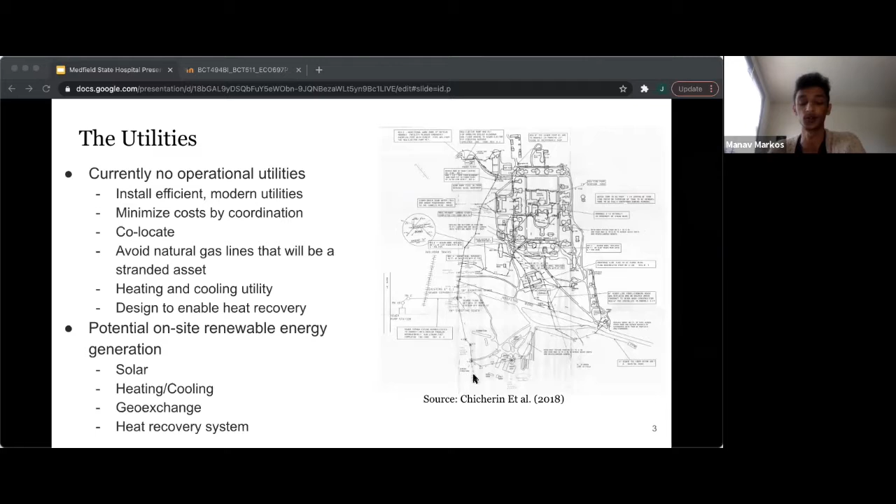So some of the town goals for the site redevelopment. The town of Medfield is looking to redevelop this campus into a community consisting of senior housing, affordable housing, and commercial shops, such as restaurants and art centers. We looked into what Medfield wants for this project. In Article 20, the Medfield State Hospital District Zoning Amendment, it outlines in the purposes of Section 1, subsections F and G. F encourages preservation and rehabilitation of historic buildings, and G encourages the adoption of energy and water efficient building practices and sustainable construction methods and practices. We have designed our solution to fit this exact criteria.

Our solution is that we are proposing a district energy system, as it will address a number of the site's needs. It would allow for all of the energy efficient heating and cooling systems while keeping the site's beautiful aesthetic and historic feel. So your next question might be, what is a district energy system? A district energy system is a system that uses centralized equipment to transport heat energy to heat and cool buildings. A DE system circulates low temperature hot water or cold water for climate control of the interior space. It can also provide or preheat domestic hot water.

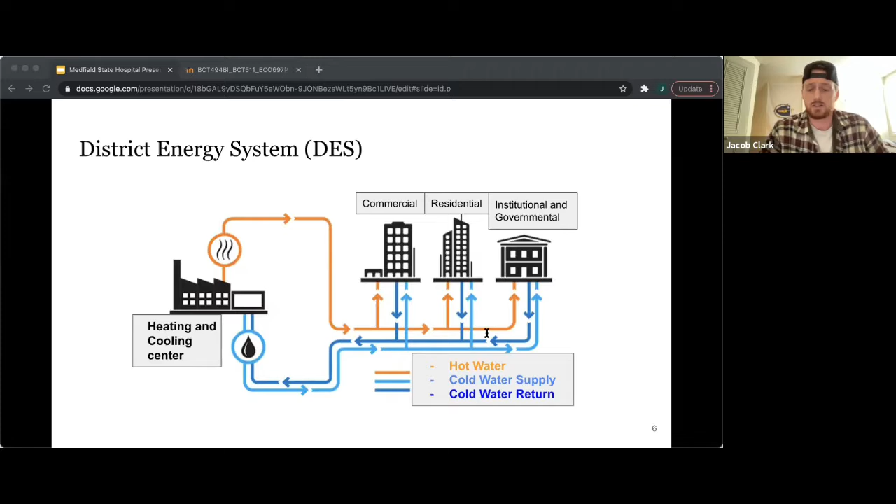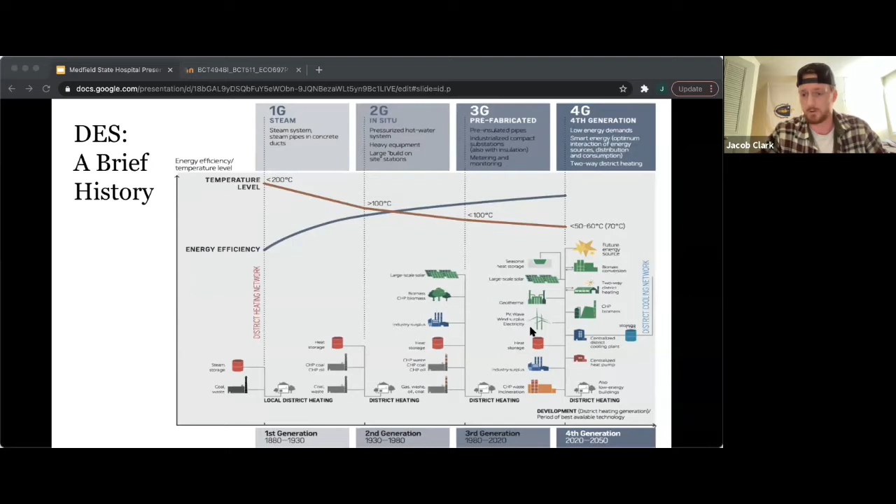Below 60 degrees Celsius, which is 140 degrees Fahrenheit, it's possible to use renewable energy and heat pumps to deliver heating at efficiencies as high as 800%. There are several modern DES characteristics that Medfield would benefit from if included in the design, such as designing for prefabricated distribution systems with accurate metering, designing for multiple sources of energy. You'll notice that the fourth generation of DE systems can make use of both short and long-term heat storage, geothermal energy, and centralized heat pumps and chillers.

Designing for low energy buildings, effectively allowing the DES to satisfy all energy needs at considerably lower cost than individual systems in each building would. We will be discussing high performance standards for insulation and air sealing as a critical recommendation in this section. Lastly, designing for two-way district heating and cooling, allowing the system to trade heat between buildings. This means buildings with excess heat have it removed and transported to buildings that need heat, resulting in an extremely high efficiency.

I also want to point out that being part of a district energy system does not mean that every building, every section within each building gets one temperature. There are thermostats in each of those areas to separate heating zones, and residents in each unit can choose the temperature they want, and the temperature sensors end up sending heat to where it's desired.

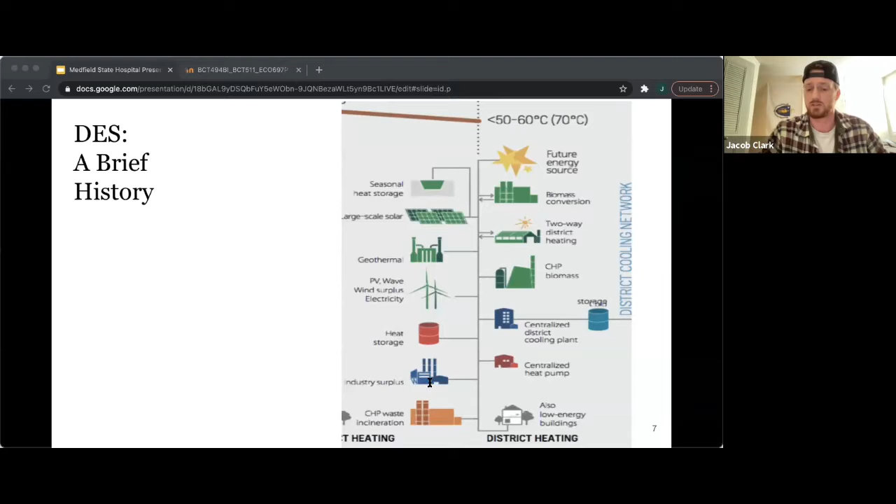A DE system allows for easy expansion for other sources post-development of the DES. This is really important. Like a solar field could be readily integrated into the energy system without any major overhaul. A thermal storage field could be added. Heat recovery from sewage could be added, and emergency backup generators, which should be added. DES can be easily managed through various systems, such as a Geographical Information System Network, known as GIS. And GIS is a spatial data tool, which Brett will go more in depth on right now.

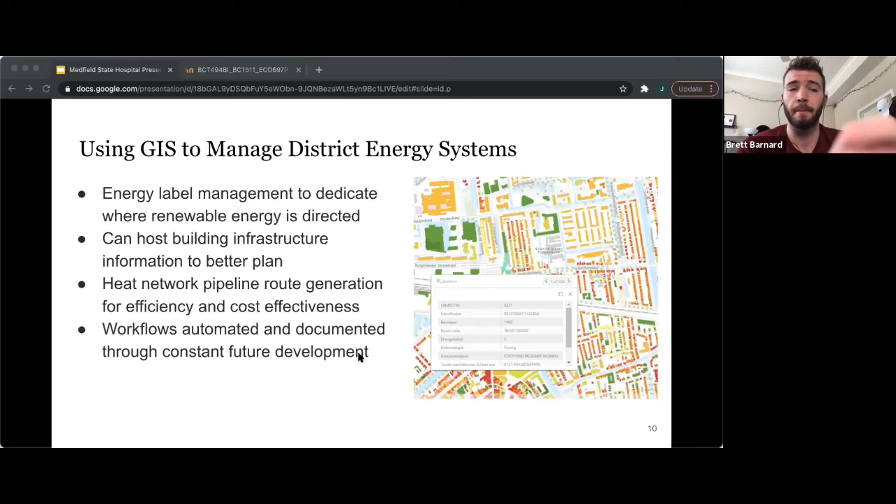With pipe planning as well as extension, GIS can generate the most efficient and cost-effective routes for these pipelines, such as going through a grassy field or area instead of intersecting under various building structures that have pre-existing pipelines, so it can keep future planning consistent as well as lowering further costs. And it can also help with documenting workflows and automating those with the added benefit of increased consistency to pinpoint these issues and maintain work orders.

This DE system we propose comes with numerous benefits, such as it allows for cheaper operational costs, efficient energy production, and heat recovery. It's future-proof, as mentioned before, meaning there's flexibility with renewable energy and reduced maintenance costs. There's also benefits that haven't been mentioned yet. These buildings were designed for using a district energy system application, as Jake mentioned previously. This hydronic heated water distribution system uses small pipes as opposed to large air ducts.

Retrofitting is a difficult process that doesn't give the best results. It would not apply to this project because this system could be designed specifically for this Medfield State Hospital. Avoiding retrofitting avoids one of the largest costs by doing it right the first time. District energy systems are not restrictive, just as long as the developer designs for low temperature hot water. Finally, a DES allows for easy expansion for other energy sources post-development, as Jake mentioned previously, as well as being easily manageable through various systems like Brett also mentioned.

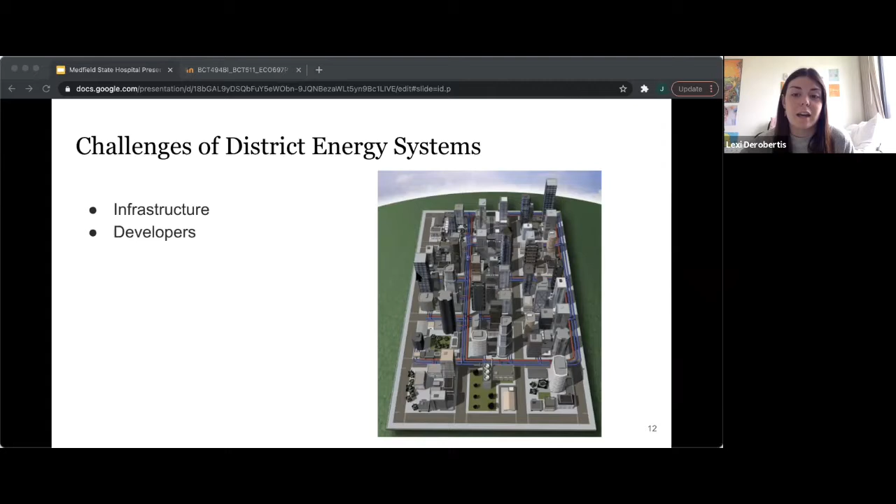Finally, the DE systems are more common in Europe than in North America. So many local developers may not have built a DE system before, but that shouldn't be excluded solely on that. We will recommend the developer qualifications later in our presentation.

Our team agrees that as part of the DES, a geo-exchange field combined with heat pumps should be a part of the system. Let me share a bit about those. Heat pumps are powered by electricity, and heat pumps aren't just for heat, but can provide both heating and cooling. They operate similarly to a traditional air conditioner, but can switch between heating and cooling modes depending on the season. In the case of district energy systems, they can also move heat from a building that requires cooling to one that requires heating, essentially doubling the energy efficiency.

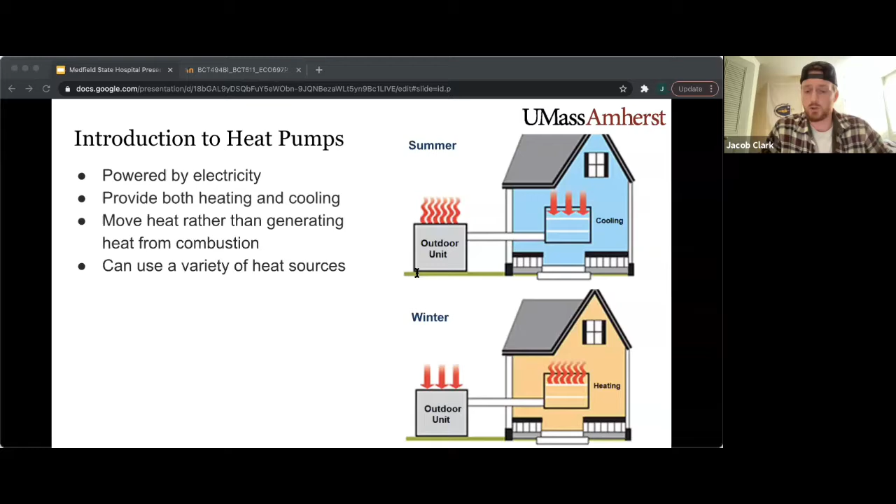Heat pumps move heat across a temperature gradient rather than generating heat from combustion of fossil fuels. This improves the system efficiency. And heat pumps can use a variety of heat sources and distribution systems, which we'll discuss more in detail on upcoming slides. Heating and cooling can be distributed in the form of hot and cold water, a hydronic system, or air.

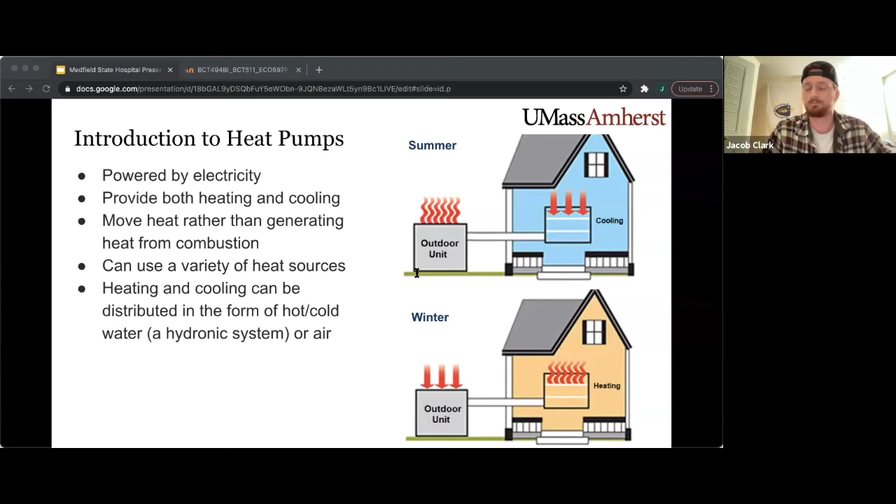There are a variety of types of heat pumps, and this slide gives an overview broken down by heat source, which is where the heat pump obtains heat in the winter for heating purposes and where it rejects heat in the summer for cooling purposes. The first option is an air source heat pump. They are most commonly used in the US, and they have the lowest initial cost. Their heating efficiency and capacity does decrease with decreasing outdoor temperatures, but even in very cold weather, modern heat pumps still provide heating at twice the efficiency of boilers and furnaces.

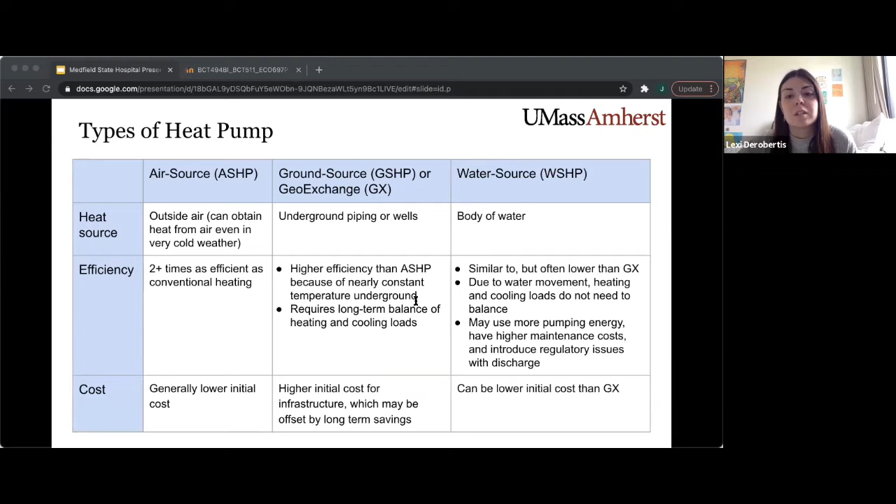Another recommendation we ask you to consider is a geo-exchange system, also known as a ground source heat pump. These use underground piping as the heat source, which requires a greater initial investment into infrastructure, but also provides higher efficiency because the temperature underground is more consistent throughout the year. Geo-exchange systems require appropriate site conditions, which Brett has created a suitable map for and will discuss shortly. The last option you should consider for this site is a water source heat pump. With this, the nearby Charles River could be used as the heat source.

Okay, so you've heard us discuss geo-exchange a few times by now, and with that being one of the main energy sources, we want to dive into a little more detail here. So at its simplest form, geo-exchange is a form of thermal heat storage where that heat can be stored and reused in the future. A geo-exchange field works by drawing its power or the heat from one source and then pumping it into the other.

So in the winter months, that heat would be drawn from the earth and be pumped back into the interior spaces of the buildings. In the summer, that heat will be drawn out from the buildings, those interior spaces, and then pumped back into the earth to be stored to be used at a later date.

So it's different from typical space conditioning units, where geo-exchange heat pumps are not exposed and have fewer mechanical parts working. So it'll be much easier to find a source and central location. You have better visibility and ease of maintenance there. This is what you call a balanced heat source and heat sink. They're much more dependable due to the earth having a very consistent temperature, as opposed to outside air temperature used in many heating systems, which has a high amount of fluctuation to it.

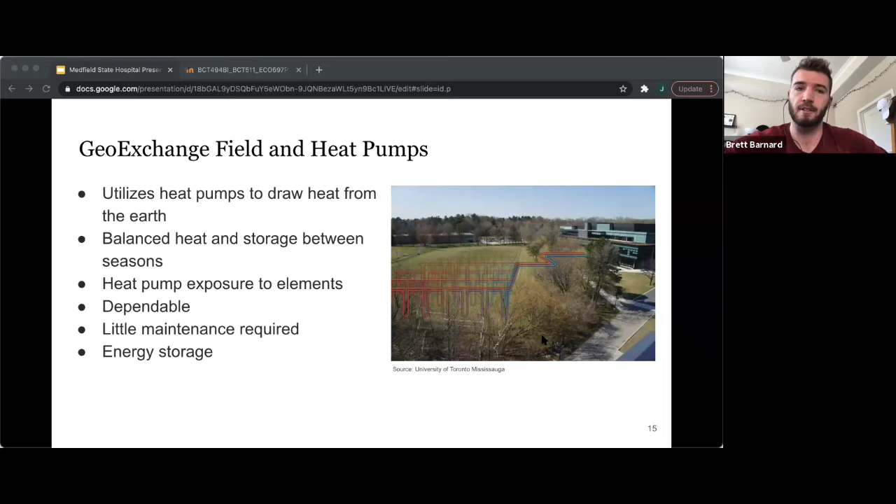And with these geo-exchange fields, you can't really simply put them in any single field. You'd want to do it to maximize its efficiency. You'll hear us talk about maximizing efficiencies many times. So geo-exchange fields have certain conditions of where they should be implemented based on a variety of factors. One of those big factors is going to be the soil. There are various soil characteristics which can make geo-exchange far more efficient and suitable. Some of those being proximity to the water table, how resistant that soil is to flooding, the moisture content, and then the soil saturation and drainage.

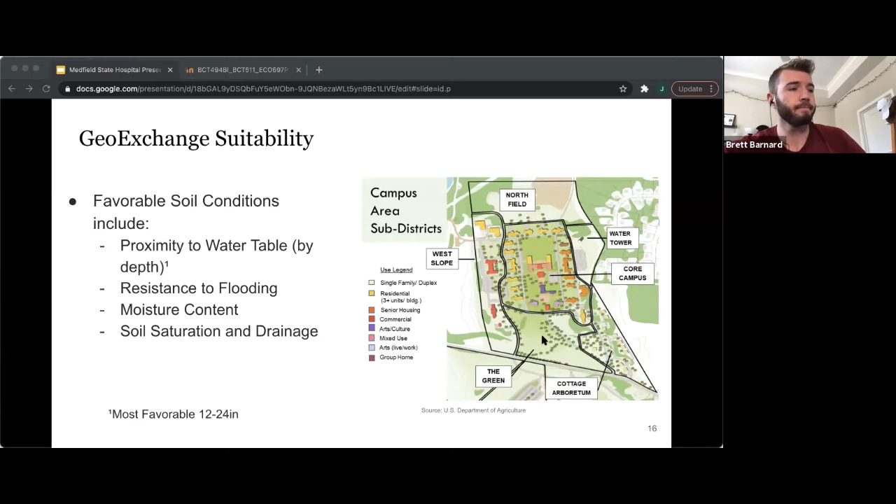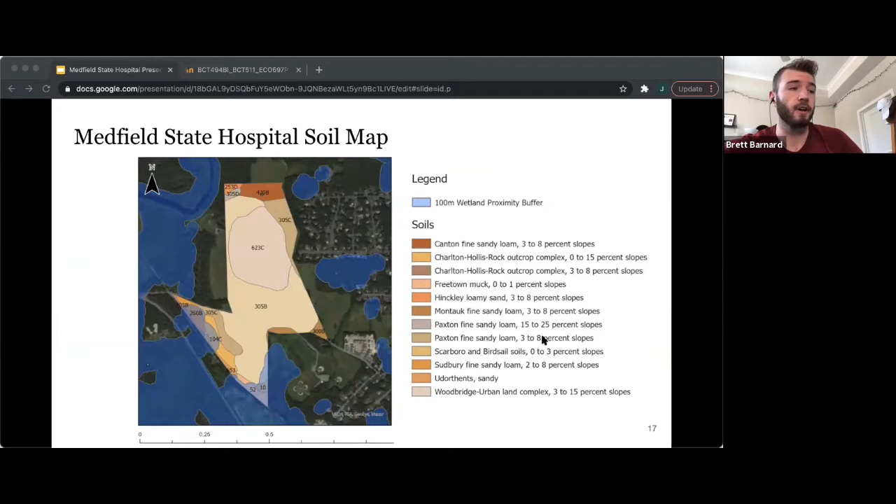So the soils that are in the campus area were rated on a 3-point scale for how suitable that makes it for geo-exchange. Each of the soils displayed in the previous slide contain these attributes that we take a look at here, and there's a heavy correlation between geo-exchange suitability and overall development for further district energy system expansion, which we'll also talk about a bit later.

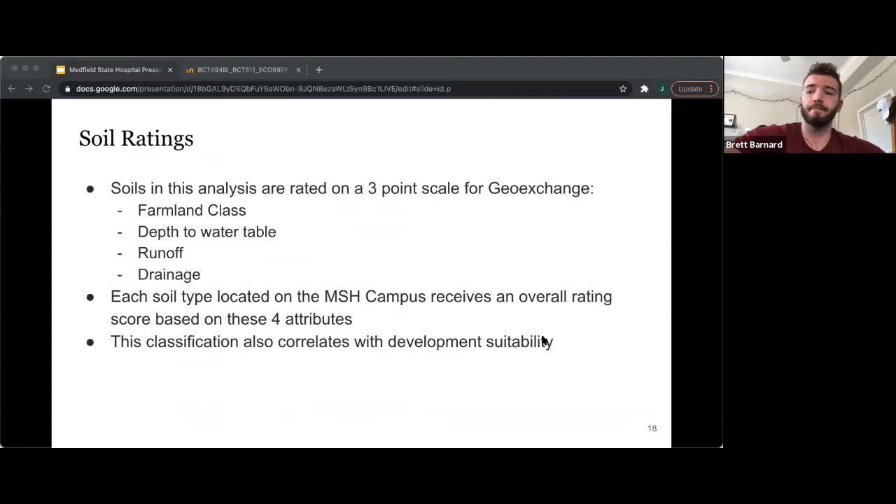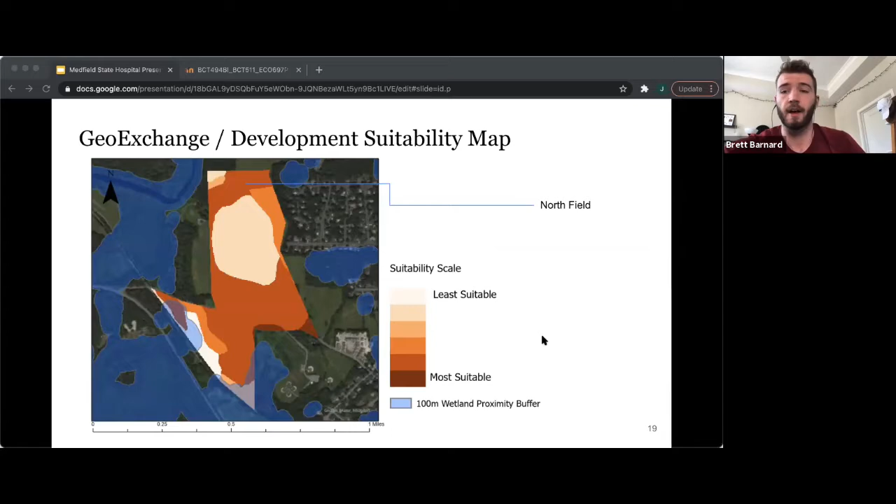And you've also heard us talk about many possibilities for future-proofing and expansion beyond just geo-exchange. So these DE systems are very versatile. They can utilize a variety of energy sources. There are several options just beyond geo-exchange here. Eventually, development and associated heating and cooling energy demands may expand beyond the capacity of the available land. So utilizing the Charles River actually has potential for an unbalanced water heat exchange. This can complement the balanced heat exchange provided by the geo-exchange field.

There's also heat recovery from sewage. You have most water headed down the drain that's heated anywhere from 90 to 110 degrees Fahrenheit. It'll travel through the pipe, it'll be used for just a few seconds, and then it goes right down the drain and the energy is lost to the ground. What we aim to do with this district energy system is recover that heat, while not reusing the water, which is now classified as sewage, and it has a huge potential to give the Medfield State Hospital massive energy savings.

Unlike geo-exchange, which uses the thermal mass of the earth relatively close to the surface to extract and deposit heat, you have the potential for deep geothermal, which is a cutting-edge technology. It's enabled by new drilling techniques that directly harvest the limitless heat of the earth more than a mile below the surface, even in areas like ours with low seismic activity. This technology is in development, but it's very promising, and it's entirely compatible with the existing district energy system.

One potential land use for some parts of the property might also be a solar photovoltaic array. The electricity generated could partially run the DES. However, another solar application would be to collect solar thermal energy and store it either in a large thermal storage tank or directly inject that heat into the geo-exchange field during the summer, because you would therefore increase its heating capacity in the winter.

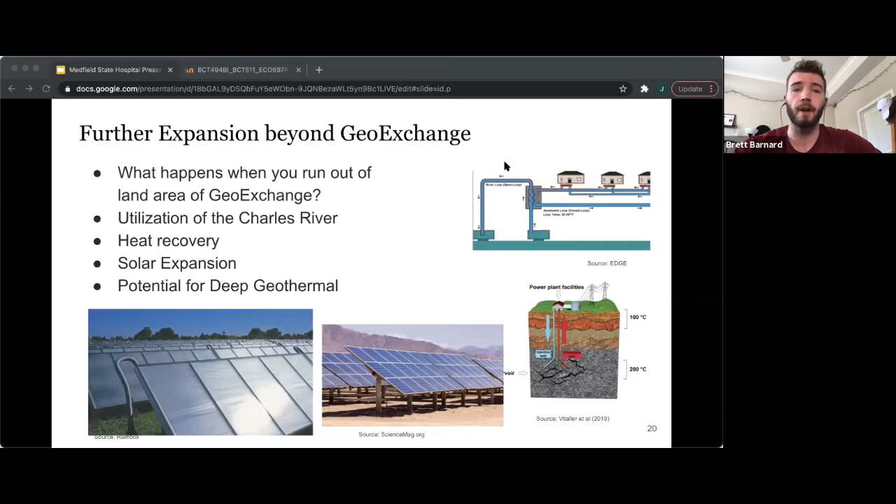As you can see from the graphic, all of the heat sources we discussed operate at a relatively low temperature for a heating system. And using a low temperature hot water system, we can effectively use those temperatures provided in the most efficient way. Heat loss is a pretty big factor in most systems, and more heat is lost when the temperature gradient is larger, meaning having a low temperature system means less heat is lost.

Little hot water pipes are better than large air ducts at transporting heat as well for the same reason. By using heat in the most efficient way, we can save on energy costs since heating is usually a big contributor of total energy use, and we can use hydronic systems to distribute this low temperature heat to indoor sources.

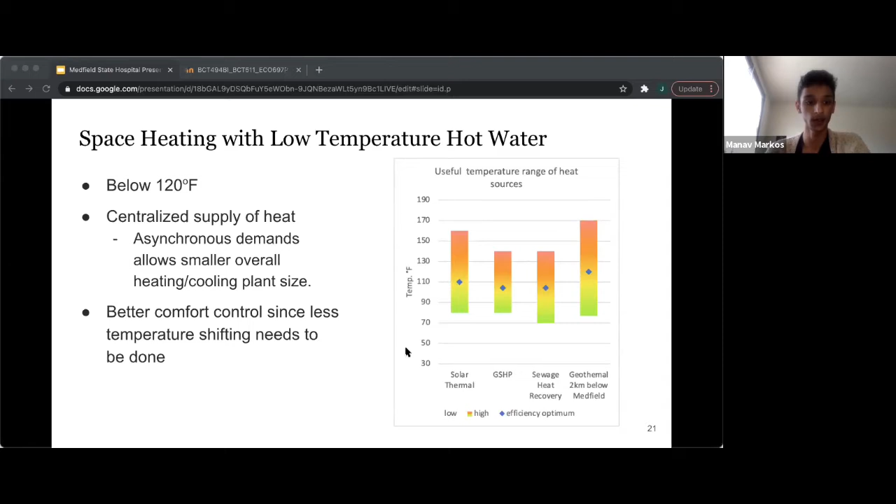So low temperature hot water systems have a variety of inputs and outputs for both heating, like radiant flooring, ceiling and floor panels, and wall radiators, as well as cooling, like fan coil cooling and ducted hydro air systems. We can also use radiant flooring as cooling.

When renovating a construction, it's important to consider the future life of the building. High performance envelopes are crucial to maintaining the building characteristics long into the future. And the passive house standard is a high performance standard for that metric. It offers high levels of insulation, energy recovery systems like heat recovery ventilators or HRVs, and minimal heating and cooling required. Aiming for passive house levels of building performance is better for the longevity and sustainability of the site.

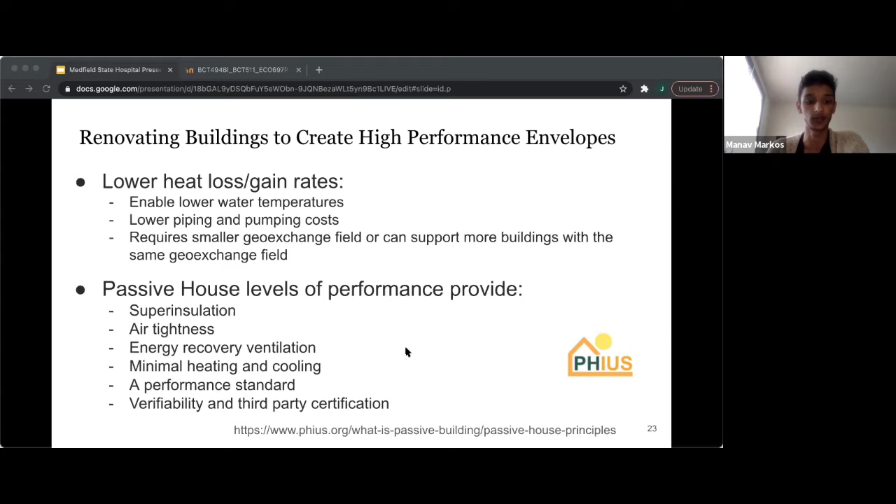There are some historic restrictions, however, mostly relating to the NPS regulations, like maintenance of historic character, complying with building code, or better if possible, and sustainability goals. However, there is no need for compromises since using the site's available well-designed resources, as well as modern construction techniques, lends itself to creating a historically pleasing building with all of the benefits of high performance as well.

One good example is the survival of the brick detailing. It means that it was designed with the future in mind, and we're able to figure out from having no interior heating that the brick will be able to handle the future insulation as well, since the heating and cooling it would have experienced already is enough to know it can handle internal heat shifting as well.

Also, if you note, the brick detailing at the roof level is designed to shed water away from the building's envelope to protect that brick from moisture damage. Some extra measures might need to be taken at the window and ground joints, however. The ground may need to have some more drainage to protect the ground level brick from future moisture damage. We can't tell exactly, but it's usually good practice.

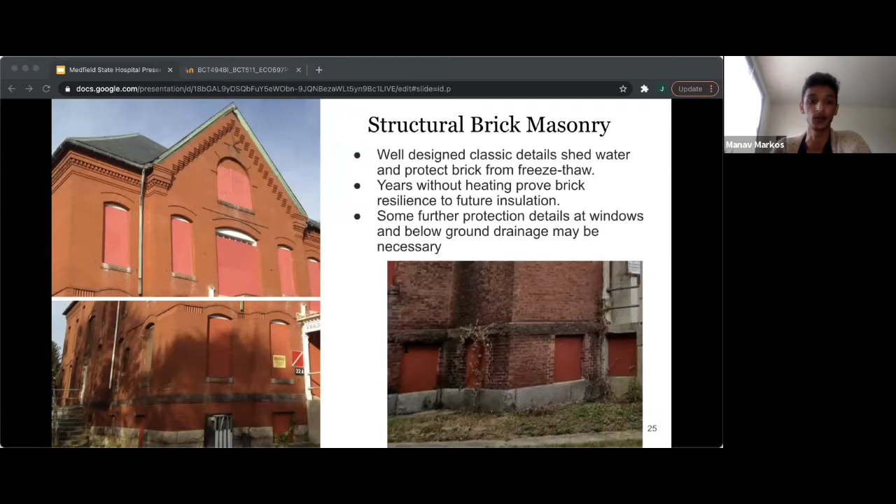And you can tell that the windows are kind of leaky in masonry, but you can see in the windowsills that it's actually leaking out of the windows. So it's shedding water away from the interior, which is a good sign of brick construction.

So historic buildings do tend to be quite thermally inefficient since they weren't constructed with our current understanding of insulation in mind. Companies have products with historic looks that can be used to remedy this exact case. These companies focus mainly on historic retrofits and as such have a myriad of products for any number of use cases, and using them in a whole site redevelopment means we get the efficiency of a modern envelope without having to sacrifice the historic look.

Using the existing materials on the site reduces the embodied carbon of the development, lowering how much carbon is used during the build process, also again aiming to maintain the same look and feel. Upgrading the building's envelope increases the efficiency of the whole site, like I said, since buildings take up a large portion of energy usage.

And having such a deep renovation means we can install foundational insulation as well as radiant flooring while installing drainage or other ground level infrastructure. It all boils down to maintaining the feel of the site while modifying the envelope of the buildings to increase the total efficiencies.

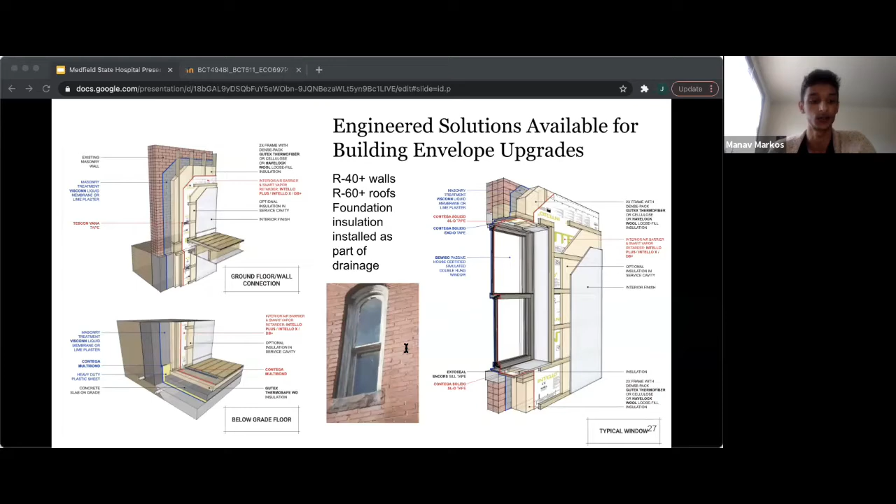Now, diving deep into specifics related towards the town of Medfield, it is important to note that once the property is sold, Medfield has very little control over the choices the developer makes. So developer selection and early standard setting is critical to success in meeting town goals. To ensure that the goal for a high site reuse value is met, we recommend that Medfield uses a variety of approaches at the point of maximum leverage to make sure that the main goals are met for historic preservation, energy efficiency, minimized carbon emissions, cultural, business, and residential development.

Existing ordinances require compliance with historical commission guidelines. We have illustrated several ways that this does not have to act as a barrier for high performance buildings. On the contrary, very high performance windows with historically appropriate appearances are still available. There is no need to compromise by allowing combustion exhaust and outdoor HVAC units if all heating and cooling is connected to the DES piping system hidden underground.

Also, the town may want to consider enabling ordinances that allow the existence and management of a DES by a third party, and may similarly set minimum standards assuring that all development on the property is capable of being connected to the district energy system. It may be preferable to use a bid adder in selecting the site developer that gives credit for the plans with DES compatible HVAC and passive house level building and envelopes.